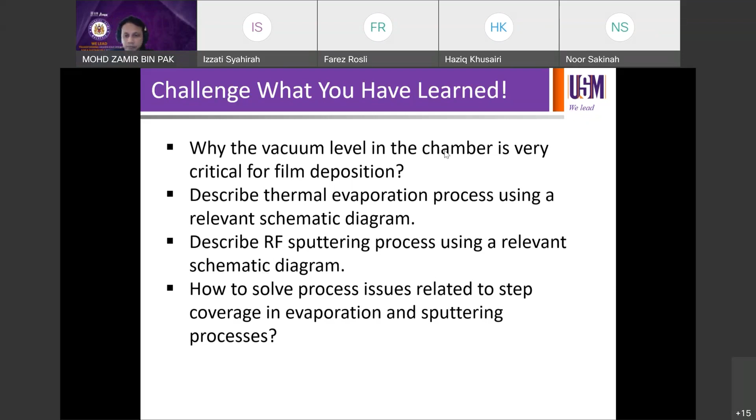Okay, so good, done. So let's move on to our new topic, which is CVD. So as I said last time, when we talk about film deposition, they can be divided into PVD, category besar, PVD physical vapor deposition, and another big group called CVD, chemical vapor deposition. And PVD can be divided into evaporation and sputtering. Evaporation can be divided into thermal and E-beam. Sputtering can be divided into DC and RF. Okay, nampak, kita dah habis the whole PVD.

Now we're coming to the second category, which is called CVD, chemical vapor deposition. And in CVD, we have quite a long list of types for CVD. Tapi kita akan just go through the basic ones, because the whole idea of having different CVD is actually, if you follow the history, if you read the history, selalunya kalau researcher or scientist dia jumpa satu proses, they work on CVD, then dia jumpa satu proses, they modify, and they can see certain improvement in the film quality or in the device results.

They coin that configuration as a new CVD. They are the first to coin it, dia yang bagi nama lah, more or less. Okay, dia jumpa tu configuration, also it works, then you call it something CVD, something else CVD. So that's why you can see so many different types of CVD. So this goes back to the literature - you have to understand why it was coined such a way, why it was named such a way, right?

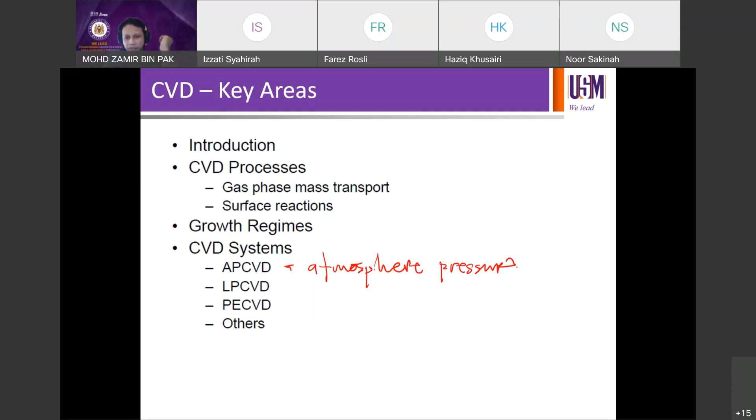So introduction to CVD, and then the processes involved, the steps involved in a typical CVD process, the growth regimes in CVD, CVD system, for example, AP CVD. AP is atmospheric pressure, so it can be done at atmospheric pressure, actually, not necessarily at vacuum, in vacuum condition. Atmospheric pressure, AP, ya, CVD itu sama ya, chemical vapor deposition, but AP is atmospheric pressure, so that means it can be done at atmospheric pressure.

Okay, ambient pressure. LP, apa LP? Low pressure, low pressure CVD. Apa PE? Anyone? Any idea?

Plasma enhanced CVD, plasma assisted. So you run your CVD, but you have plasma to enhance the deposition rate and so on and so forth. There are many more, depending on the configuration of the CVD system. The configuration will determine the name of the CVD.

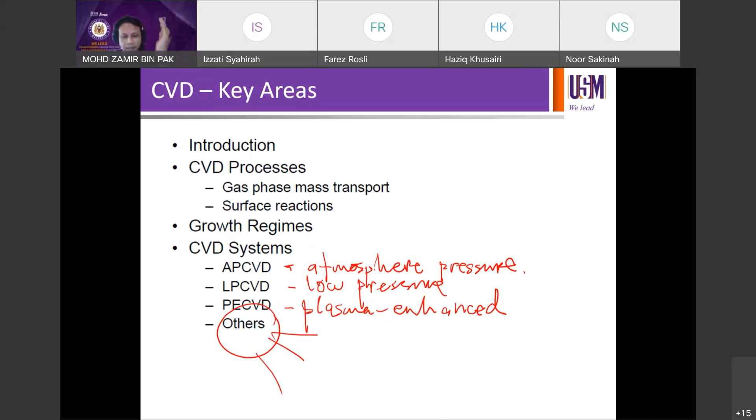Hot wire CVD is called HW CVD. What else? HFPE CVD, high frequency PE CVD. So you add high frequency in front, HFPE CVD, PE CVD, AP CVD, what else? LA CVD, laser assisted CVD. Many more, there's electron beam too. So we'll cover only the common ones, but that doesn't mean those are the only types of CVD available. There are many more, and perhaps in the future there will be different types of CVD invented by researchers.

After certain discoveries. So CVD, what is CVD? A thin film deposition process which involves a chemical reaction. This is the key word, chemical reaction. So try to compare this with PVD, physical vapor deposition. This is chemical vapor deposition, so it's not physical but chemical. That means it involves a chemical reaction.

For example, you want to deposit silicon. So let's recap while discussing this. If you run a CVD process to deposit silicon, which involves a chemical reaction, what you have to do is use silane. SiH4 is silane, silane gas. Silane gas is very, very dangerous, but it's present in every fab. If you run CVD silicon, you have to have silane, no choice.

It used to be an issue before, an incident. There was an incident at a fab, at Silterra, and also at Infineon - silane incidents. If you remember, I shared with you before about the NUS fire, whether during this course or 386, National University of Singapore fire - the building burned down, and it was shut down for about half a year or a year, perhaps even a few years, while they recovered.

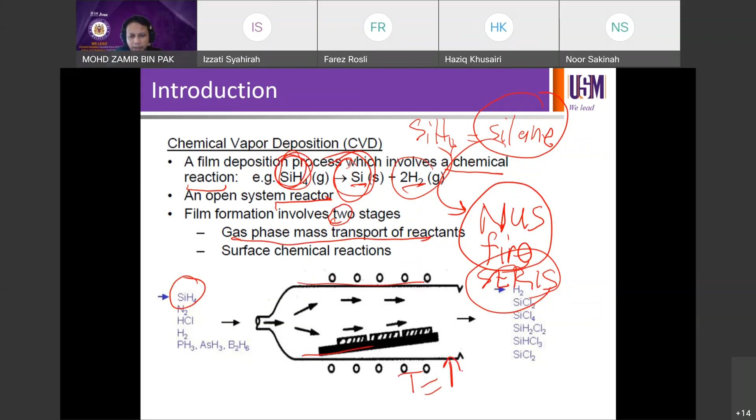Film formation involves 2 stages. To be able to deposit silicon, firstly you need gas phase mass transport of reactants - the transport of silane into the chamber. So if this is your chamber, it has to run at high temperature, because you need thermal decomposition. If you don't run at high temperature, there will not be any thermal decomposition, since you need heat to decompose, heat to break down the gas. So you have to have high heat from the high temperature process, then your gas will come in. Other methods can also be used if you want.

And then the second step will be surface chemical reaction. The moment your gas is transported into the furnace at a certain temperature, there will be chemical reactions on the surface of the substrate that will end up in the deposition of silicon by the CVD process.

So my question is, if you can relate to the previous topic, PVD - if you don't deposit your silicon by CVD, how would you deposit your silicon? If you can relate to the previous topic - you want to deposit silicon, but you're not allowed to use CVD. How would you deposit your silicon? Anyone? How would you deposit silicon? PVD, okay, you can use PVD. How? Which PVD? Aziz, which PVD do you want to use?

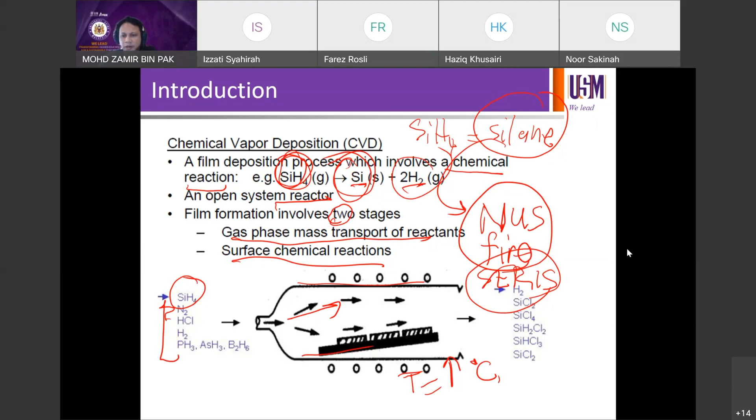So that's done. Let's move on to the next one, reactor type. It can be single wafer, it can be batch process. Typically, if you talk about mass production, then you have to go for batch process. Of course, there's no single wafer for mass production. Lab scale is okay, but if you run single wafer for mass production, you're deliberately trying to go bankrupt.

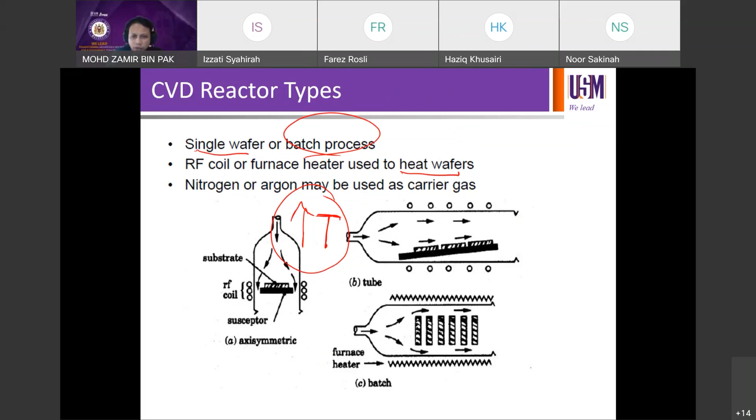Right, deliberately trying to go bankrupt. RF coil or furnace heater is used to heat wafers, so you need to have heating. You need to run the process at high temperature to induce thermal decomposition - remember, the key is thermal decomposition. Nitrogen or argon may be used as carrier gas. So the typical configuration is as shown below.

So what are the process parameters involved in a typical CVD process? Generally, there are a couple of factors, but there are more factors depending on which type of CVD you are using. Typically: the substrate temperature, the partial pressure of the gas, the total pressure, the gas flow, the time, the temperature, the configuration of the chamber, the wafer arrangement. Those factors will affect many things, and among the parameters in control are the growth rate, the thickness, uniformity, defects, particles, and so on.

So these are among the factors that you need to characterize after a CVD process or during the CVD process. Okay, growth rate you have to monitor during CVD. You have to monitor the growth over time - angstrom per second, angstrom per minute, nanometer per minute, micron per minute, whatever, depending on your intended thickness. So you can monitor that in real time, and as a result you'll get your film thickness. Growth rate leads to film thickness.

And then your defect density is typically done or characterized or inspected after the CVD process, just like what we discussed in our previous processes. So for every process you have to characterize next, and visual inspection is a compulsory step - a compulsory characterization that you have to do after every processing. After fabrication, you always have to do VI, visual inspection.

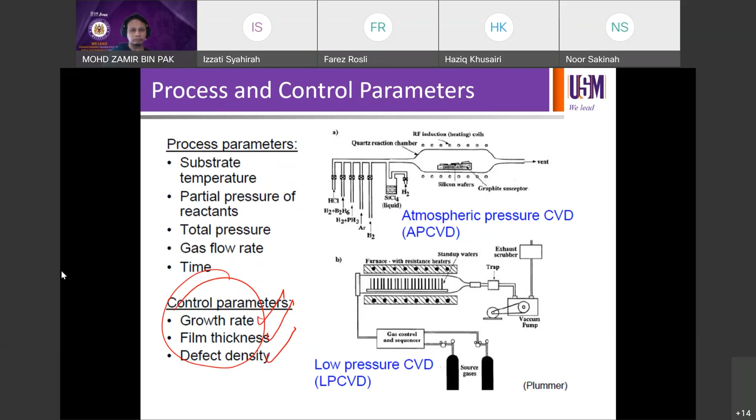What are the steps involved in CVD? The first one is transport of reactants by forced convection to the deposition region. For example, if you talk about deposition of silicon, you need to transport the silane gas into the furnace to be thermally decomposed into silicon and hydrogen. So that is the transport part.

Transport of reactant by diffusion from the main gas stream through the boundary layer to the wafer. So this has reached the wafer, somewhere there. The previous step was maybe further back, just entering. And now it has reached the surface.

The third one is adsorption of reactants to the wafer surface, and they start to be deposited on the wafer surface. Then there'll be surface processes, including chemical decomposition reaction, thermally decomposing the SiH4, surface migration to attachment site, and the silicon will be landed or deposited at the right site, incorporation, and other surface reactions. So this is where you get your film.

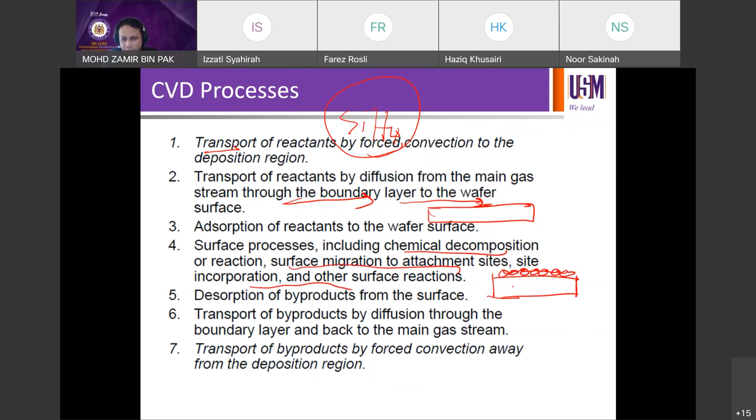Deposited. Say this is silicon as an example. If you are depositing your silicon on a quartz substrate, this is your silicon. So this is what's happening at this step.

Desorption of byproducts from the surface. This is where the byproducts occur. If you're talking about the reaction of silane, we're talking about silicon plus 2H2, and your byproduct will be the hydrogen. Desorption means they are released from the surface, so due to thermal decomposition, they can break into silicon plus 2H2, and the 2H2 will be desorbed and eventually

removed from the system. Transport of byproduct by diffusion through the boundary layer back to the main gas stream. So it comes out back to the main gas stream and it will be exhausted, we will exhaust it out.

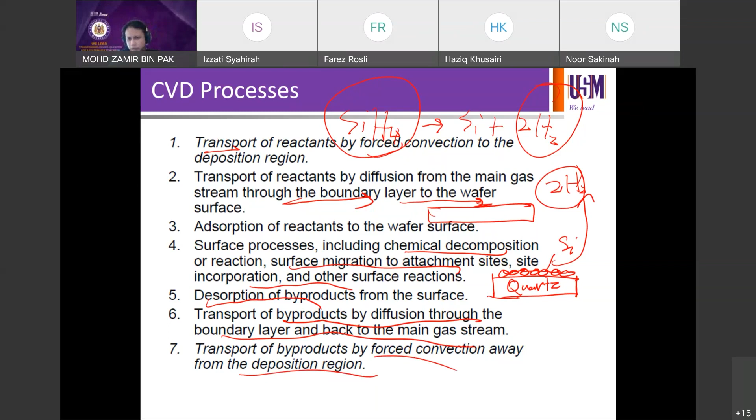Every system has input and output. Input is your gas stream for the deposition, and then the byproduct will be removed using exhaust. Transport byproduct by forced convection away from the deposition region, away, out through the exhaust.

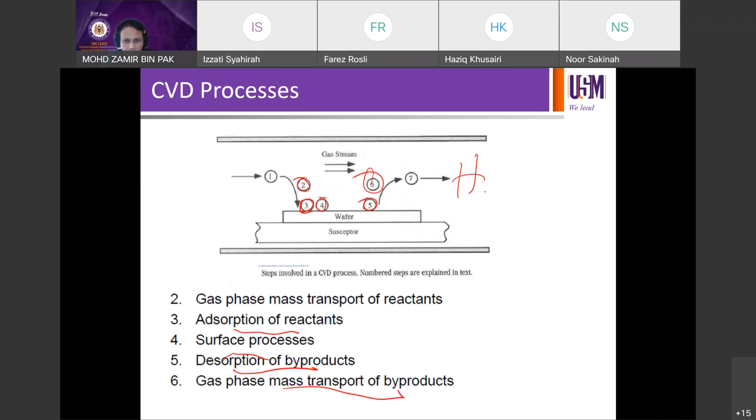So you can also represent these steps as this schematic. Gas stream coming in, then mass transport of reactant number 2, then adsorption of reactants to the surface, start to be deposited, and then there'll be surface process, and they can start the reaction. Then number 5, desorption of byproducts, hydrogen will be released, and the gas phase mass transfer of byproduct, removing the hydrogen,

and then it will be exhausted. This is the same thing, except this shows a generic representation of the thermal decomposition. In our case, we've been talking about silane as the precursor gas, silicon as your solid to be deposited, the film to be deposited, and your byproduct here will be your hydrogen.

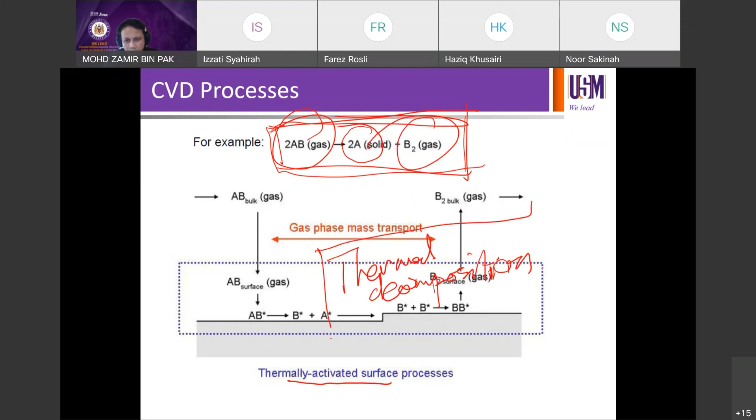So this is a generic representation for all thermal decomposition processes involving any precursor material, thermally activated. So you have to have thermal decomposition, that's the key. You have to use thermal, high temperature, to break the precursor gas into the intended material to be deposited.

In terms of the mass transport flux, you can also represent this by this reaction. So this is your silicon wafer, for example. Then your F1 will be the mass transport flux, F1 coming from silane, SiH4. F2 will be the reaction flux, because you want to deposit your film, and then the reaction.

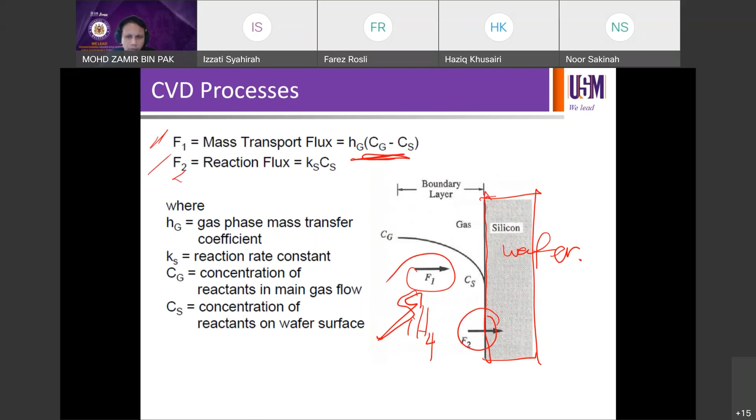We learned this before, when we talked about oxide growth. So batch process for polycrystalline or amorphous silicon prefers to be in surface reaction regime, with wafers at the same temperature. If you do the CVD process, you can actually control and regulate, meaning control, increase or decrease the temperature, and this will determine the quality of the final film. The quality here means the crystallinity.

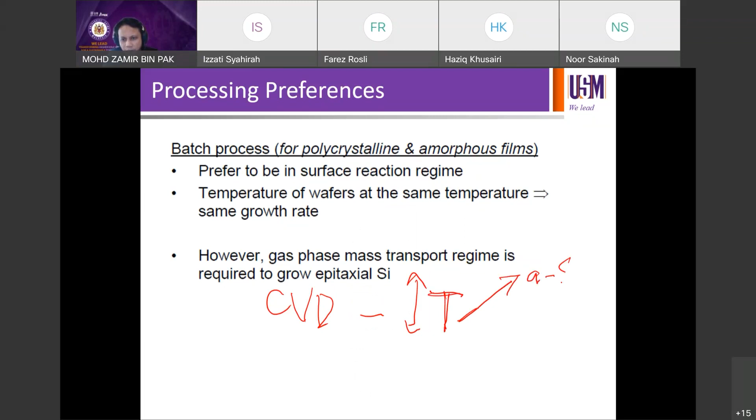So you can either get amorphous silicon, or if you talk about silicon, you may also get polycrystalline silicon. For this you have to go back to chapter 386. What does amorphous silicon mean? What does polycrystalline mean? All the grain boundaries and stuff. In some conditions, you may also produce monocrystalline silicon.

If you talk about epi process, you can actually get monocrystalline silicon, especially if you already have a silicon wafer, say P100 monocrystalline. Then you can run your CVD process to deposit a thin film of silicon, silicon too, but thin film, for example 50 nanometer, perhaps for a specific purpose in device fabrication. But you want that 50 nanometer to be monocrystalline - yes, that can be done, because you can run that at a certain temperature, especially high temperature.

The crystallinity of the deposited layer will take up the crystallinity of the substrate - meaning it will follow the crystallinity of your silicon wafer. In this case, P100 is monocrystalline. So as a result, the epi layer deposited by CVD at high temperature will emulate or follow the crystallinity of the substrate, which is monocrystalline. As a result, you can get monocrystalline silicon thin film. So that can be done.

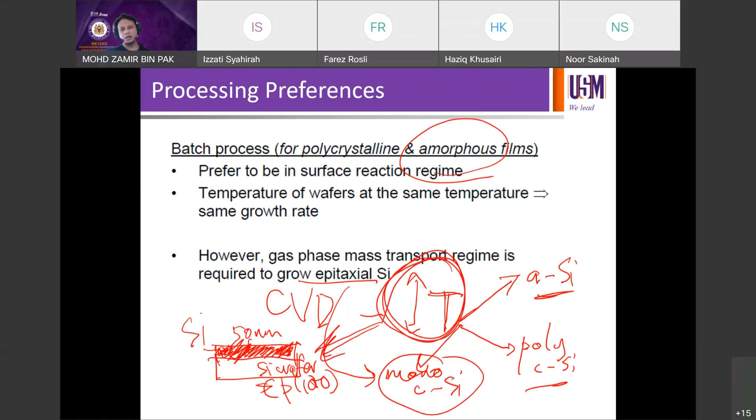So it's just about how you regulate the temperature. If you go for high temperature, it's a lot easier to get monocrystal on whatever - monocrystal silicon on silicon in this case. So you can just deposit silicon thin film on a silicon wafer. It doesn't have to necessarily be a different layer on silicon - it can also be silicon on silicon by CVD, okay, or by evaporation, by sputtering on silicon too.

So you may wonder, why deposit silicon thin film on a silicon wafer when the wafer already exists? Well, it depends on what you want to get in your process and in your device. Because you can also use, for example, your CVD to deposit amorphous silicon on monocrystalline silicon, using the same wafer. But then you can tune the process, usually at low temperature, to deposit 50 nanometer of silicon, but that particular silicon can be amorphous - it's not necessarily monocrystalline silicon or polycrystalline.

So it depends on what you want. If you go for heterojunction - if you talk about silicon solar cell specifically - it uses a monocrystalline P100 silicon wafer, but then the solar cell itself is heterojunction. Heterojunction here means, we already learned this in 386 right, you are depositing another layer of different band gap.

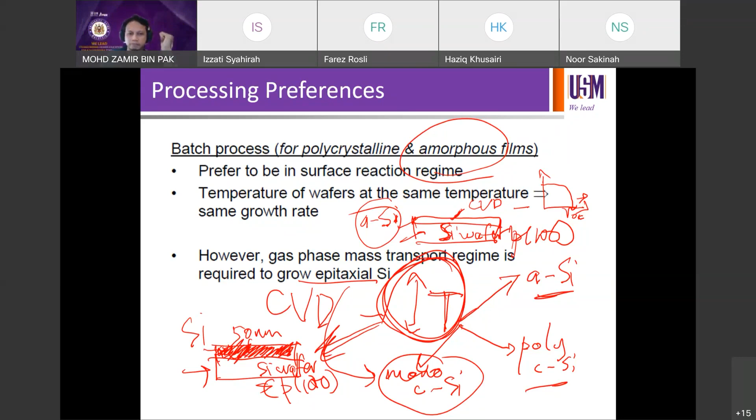That's why it's very important to relate the fundamental in 386. That's why the subject becomes a prerequisite. If you don't learn it, you become the missing piece in understanding. You know the process, but you don't know the fundamentals. When you want to relate the process to the fundamental, you'll have missing pieces - the explanation won't be complete. So once you cover both, you know the fundamental and the process, then you combine both and decide what to use for your devices.

For epi growth, typically if you want to get epi - let's finish this slide then we stop for a few minutes. Epi, you want to get monocrystalline deposition. To get monocrystalline, like I said, if you get mono on mono it can be done, but you need a high temperature process and slow growth rate. Your deposition rate per minute per second has to be low - slow process, but that will ensure monocrystalline quality. If you go faster, you'll probably get polycrystalline or just amorphous. So if you want amorphous, you can go as fast as possible since it doesn't compromise anything. But if you want mono, you cannot go so fast.

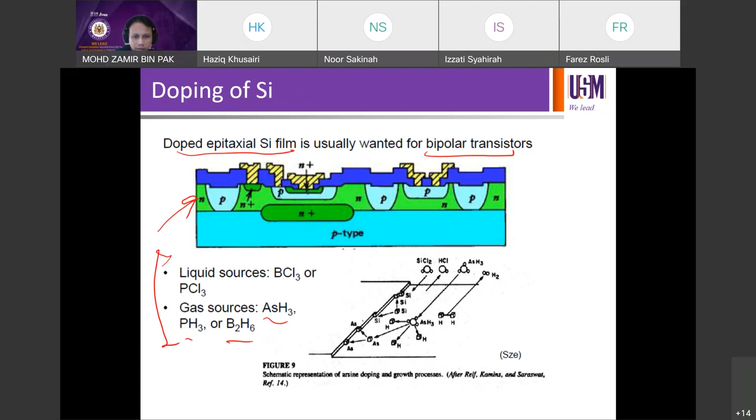If you talk about doped epitaxial silicon film, for example, these are the gases involved: PCl3, arsine, phosphine, diborane for doping, for the deposition process.

Doping of silicon - we've learned about doping into silicon for quite a bit. We've discussed diffusion, we've discussed ion implantation, and by now you already understand that if you want to dope silicon to make it N-type, you use group 15 atoms, for example phosphorus, antimony, arsenic. If you want P-type, you use group 13, like boron, aluminium, and gallium. So those are the common ones, assuming the host atom is silicon.

So when you run your diffusion process, you want to incorporate your dopants into silicon. Remember when you dope, you're actually incorporating foreign atoms into silicon. So you introduce new atoms into silicon, but there are possibilities of, for example, out diffusion.

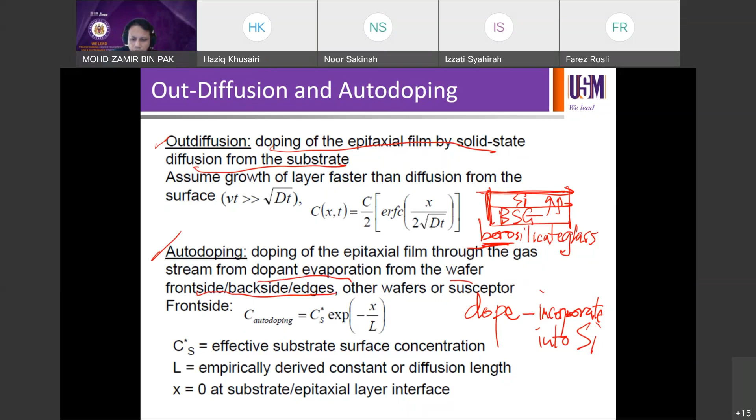I think we have this figure for auto-doping, for example auto-doping processes in an epitaxial reactor. So you're running this process in a furnace, epitaxial furnace. Illustrated here are evaporation from wafer number one, front side. Since this will be out diffused, you can actually auto-dope this front layer, or you can also auto-dope the neighboring substrate or film, because you have a gas stream coming in.

So the gas stream, acting as a carrier gas, will bring the evaporated dopant into the atmosphere within the chamber, within the reactor, to auto-dope the next substrate. That's possible from wafer front side, number one. From wafer back side or edges, it's also possible, you can dope to the side or to the edge. So you don't intend to dope, but then you dope due to the auto-doping effect.

From other wafers to other wafers, like this. Also from the susceptor, which is the holder. There are possibilities to get your dopant from the susceptor as well.

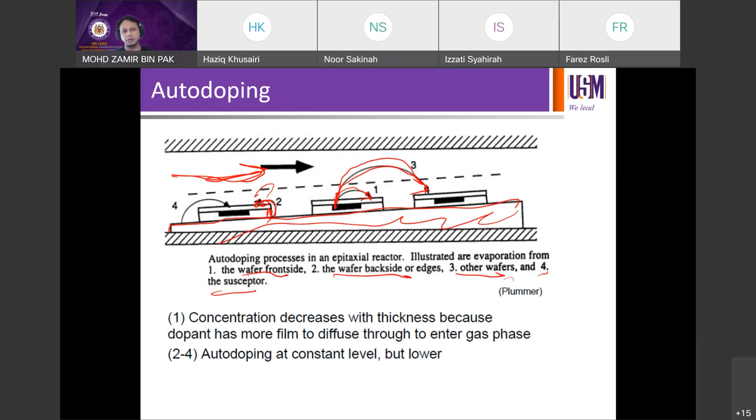Concentration decreases with thickness because the dopant has more film to diffuse through to enter the gas phase. So this will not be as critical if you have a thick layer. The possibility to happen is very small, but the possibility is there. But if your film is very thick, high thickness, the impact will be much lower because the dopant you auto-dope has a bigger volume to cover. Hence it will take some time and a big volume to cover, so as a result the effect will not be too significant.

On the other hand, if you're working on an epitaxial layer, which is typically very thin, if you have a considerable level of auto-doping, then you might change your epitaxial layer's doping level. So if it's not that critical in the thick layer, talking about microns, then probably you will not be able to see this unless you do your characterization. For example, remember SIMS characterization from before? Anyone remember SIMS?

Concentration on the Y axis, concentration of whatever dopant in this case, and the depth into the sample on the X axis. When we talk about diffusion, we talk about diffusion junction profile, ECV, SIMS. SIMS is secondary ion mass spectroscopy, one characterization method that you can use to understand the profile of your dopant.

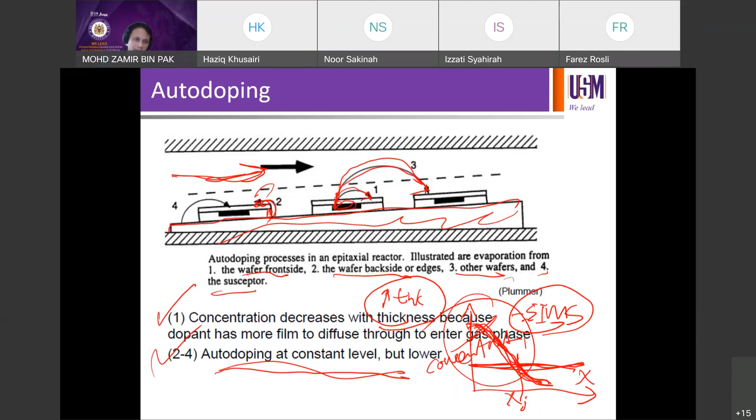If you talk about 2 to 4: wafer backside, other wafers, and susceptor. Auto doping at constant level, but very low, because it's relatively harder to transfer across that distance. But it's a lot easier to happen with the front side in the same wafer, just the next layer, just the neighboring layer. So the possibility of happening is higher. That's out diffusion and auto doping.

So, from my PhD, let me just share with you.

My PhD title was a bit long: Evaporated Laser Crystallized Silicon Thin Film Solar Cell on Glass Superstrate.

In front of that there was also light trapping, development of light trapping - I forget the exact title. That was 2016, 5-6 years ago. Development of light trapping in evaporated laser crystallized silicon thin film solar cell - I'd like to relate this to the out diffusion topic.

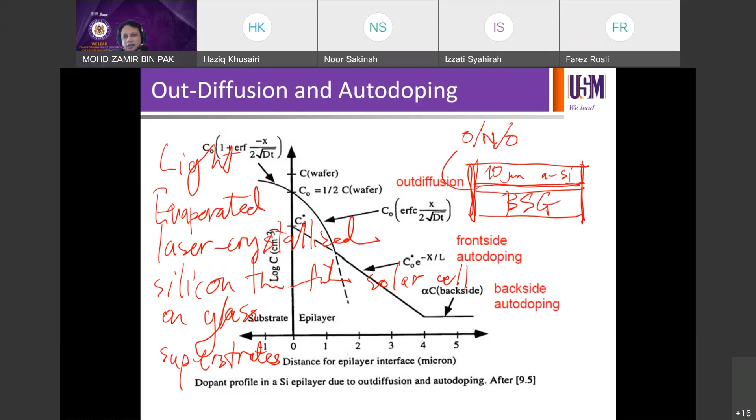I deposited 10 microns of amorphous silicon on borosilicate glass, but in between there are interlayers we call ONO - oxide, silicon nitride, silicon oxide. There are 3 layers basically in this interlayer: oxide near the glass, nitride in between, and another oxide near the silicon.

So I evaporated 10 microns of amorphous silicon using electron beam evaporation that we just learned in the previous topic. Then I obtained amorphous silicon, but I wanted to get polycrystalline. So how to get polycrystalline?

I use laser crystallization - hence the name in the PhD title. Evaporated laser crystallized, meaning amorphous silicon was laser crystallized. Using the laser, you scan it like you scan a paper in a scanner, you can see it move. So the exact thing took place - our laser used 808 nanometer IR laser, continuous scan across the film.

The moment you're doing the scanning, the portion of the silicon film on the glass that the laser beam scans across will melt at 1400 degrees Celsius. Remember we talked about the Czochralski process where you melt the silicon - in this process I use a laser to melt, to do the melting on the glass.

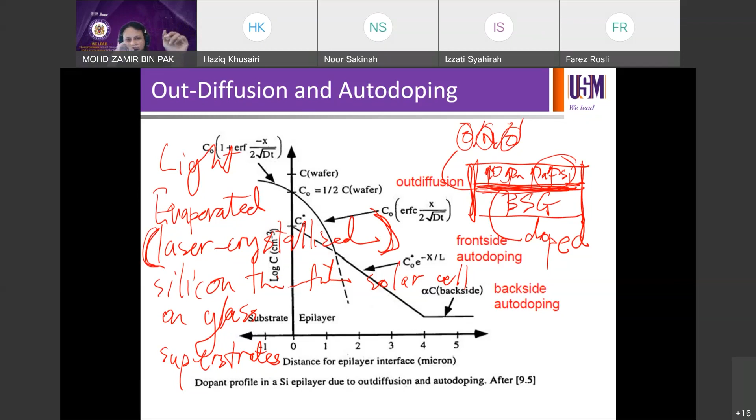So you can avoid it or you can choose not to introduce it. Generally you want to avoid defects, but in some cases you want to introduce a defect for some reason. So this is about utilizing the knowledge that you have. You don't necessarily have to take this out-diffusion as a bad thing or bad scenario - you can use it to your advantage.

That's the point. So once you've learned all these processes, you can plug them in - why don't we try this, why don't we combine with this - that's process integration. When you become a process integration engineer, you have to know how to incorporate litho, etch, with implant, with diffusion, but also with specific film deposition techniques to produce your device. That's process integration - combining various fundamental knowledge from each process into a process flow to deliver your device.

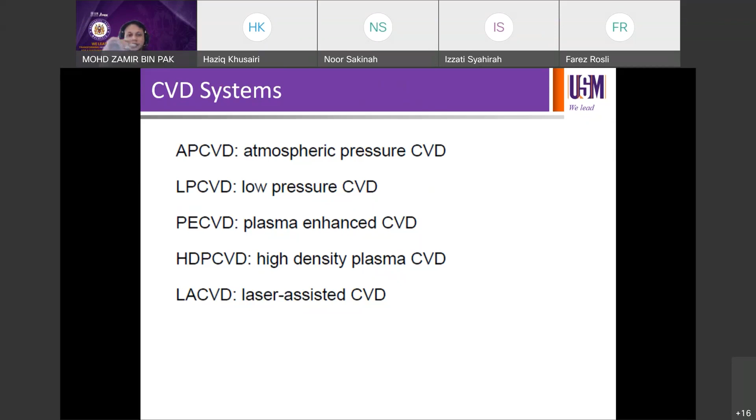Right, CVD systems - it can be APCVD, LPCVD, PECVD, HD high density plasma HDP-CVD, LACVD laser assisted, many processes, many types of CVD. But the basis is still CVD.

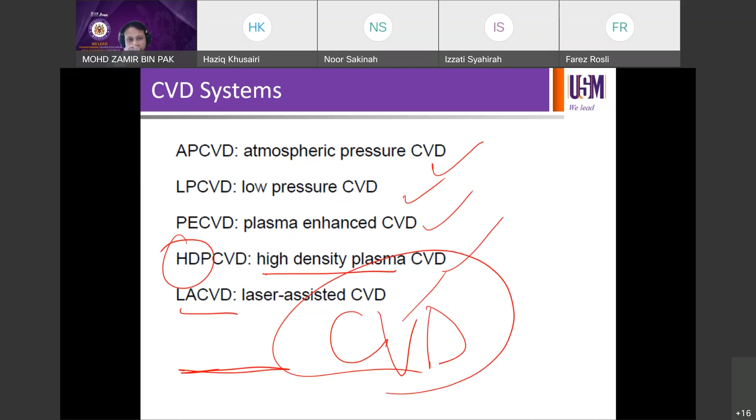You can have many things added to the front of the process name in order to get whatever properties you want, because every single process will give you different properties of the film that you want. Maybe certain properties or certain processes are good for silicon but not good enough for ITO.

Maybe a certain process is very good for ITO but not good for silicon, or good for ITO but not good for silicon dioxide. Or you can just use the very same platform, PECVD, for silicon oxide and silicon nitride, just by changing the gas - switch to nitrogen, switch to oxygen, you still have your silane there to give you silicon, but you combine it with oxygen or with nitrogen in the very same chamber.

I mean, you arrange them in sequence. Meaning, for example, if you go back to my PhD work - silicon, then you have the interlayers, the three layers - ONO layer: oxide, nitride, oxide. You can deposit these ONO layers in PECVD.

Oxide first, followed by nitride, then oxide, without breaking the vacuum. Without breaking the vacuum here means you can retain the vacuum condition in the chamber - you just introduce different gases at different times. So in this case, you start off with silane and oxygen to get silicon dioxide, then you shut off the oxygen, turn on nitrogen, and you get silicon nitride, for example.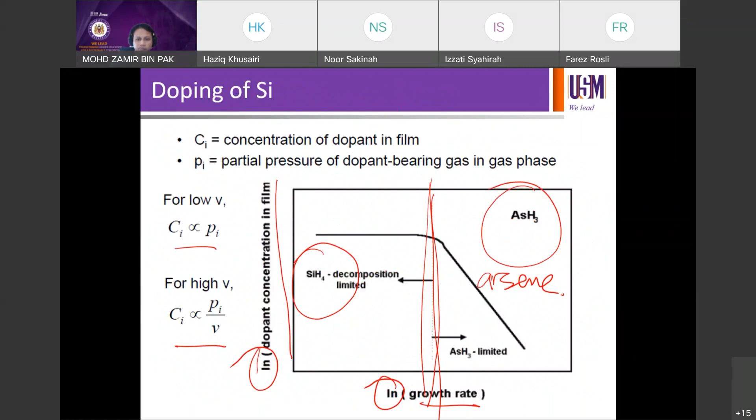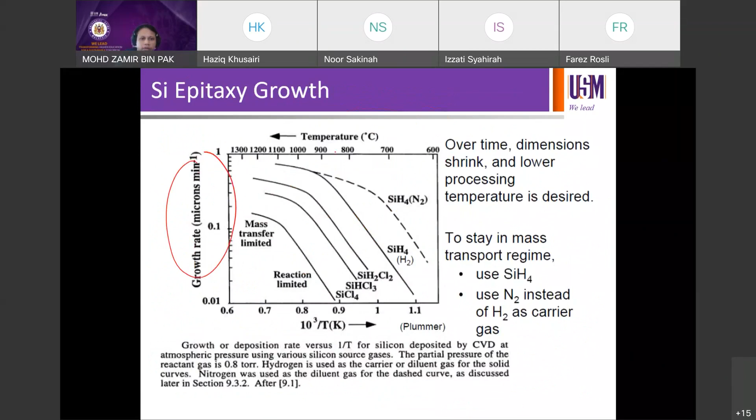This curve shows growth rate versus temperature. You can't always relate this curve to every system, because every system is unique in terms of temperature and growth rate, or velocity rate.

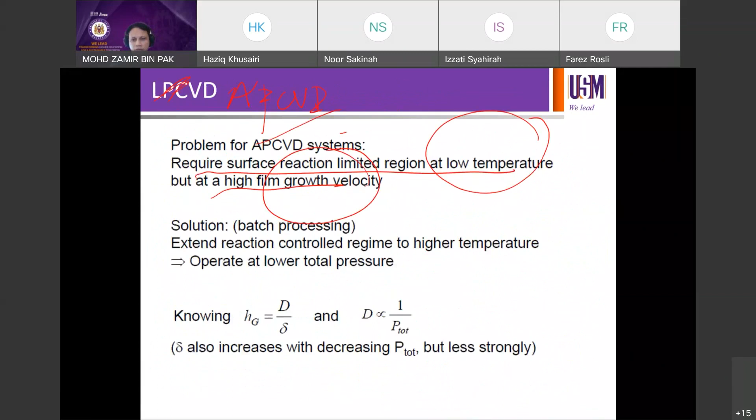So how do you find the sweet spot, meaning the optimum point? Sometimes you get a curve like this one, where it rises and then saturates. Sometimes you get something like a plateau instead.

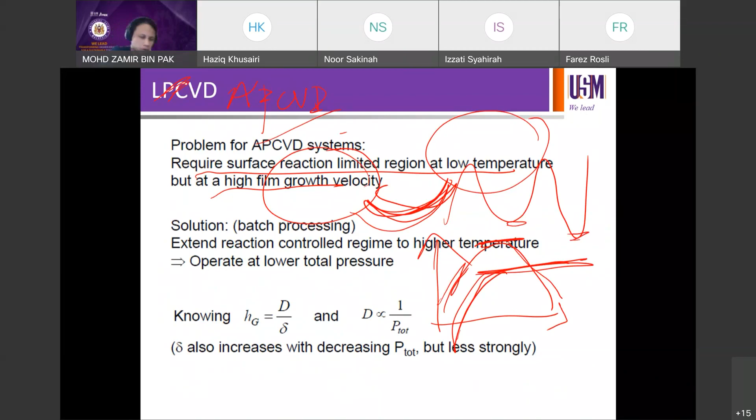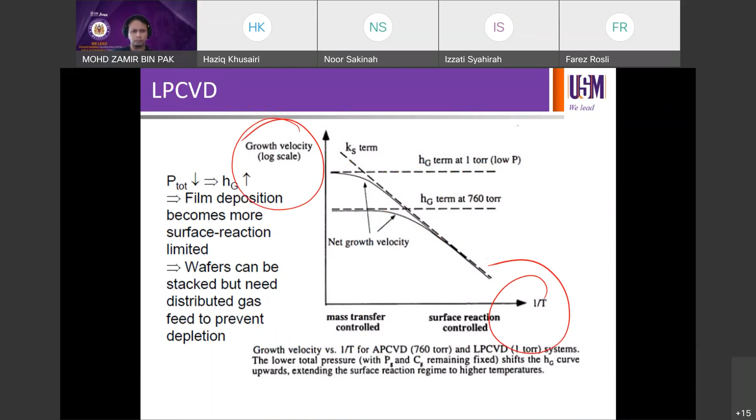This one is LPCVD. In terms of growth velocity and temperature, it's very unique to the system. This next one is the same thing - temperature and deposition rate is very unique to the system.

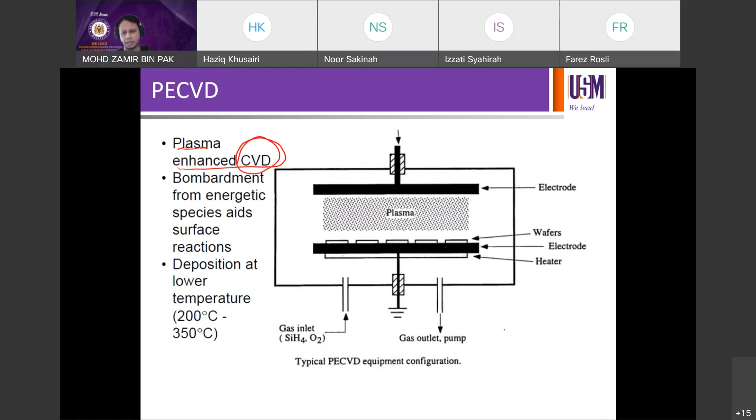This is an example of PECVD - plasma enhanced CVD. So you use plasma to enhance the CVD process. The key mechanism is still CVD, but the rate is enhanced by the plasma.

If you look at the configuration, it looks pretty similar to what we discussed during sputtering. You see plasma in the middle, and then you have two electrodes, counter electrodes with opposite polarity, then gas inlet for silane and O2, connection to the pump, grounding, and voltage to form the plasma. So the whole thing is still like the plasma system.

It involves bombardment of energetic ions from the plasma, and when you have this capability, plasma enhanced, you have an option to reduce the temperature, because in essence, CVD has to involve thermal decomposition, and to have thermal decomposition you need the thermal component, the heat component, a high temperature component able to decompose. But when you have plasma, that will do part of the job.

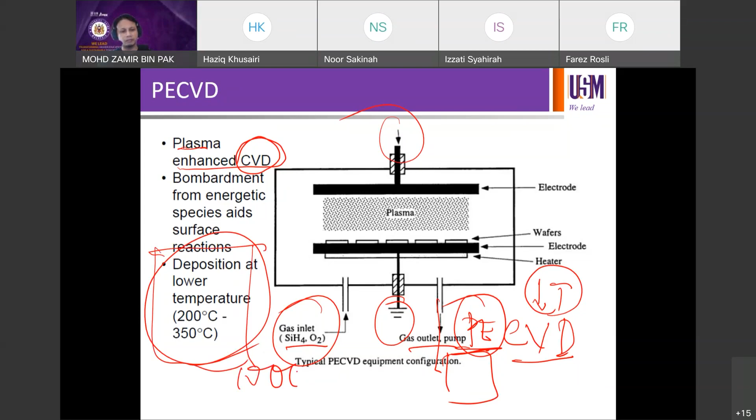The plasma will enhance the decomposition, and as a result the system doesn't need to run at a very high temperature. Perhaps if you run a typical CVD, you used to run at 1000 degrees C. So with plasma enhanced, since you already have the plasma in the system which will enhance the decomposition, you then have an option to reduce the deposition temperature.

So when you have plasma, you have low temperature, and you can regulate or optimize these two parameters in order to produce the intended properties of your deposited layer. The plasma will enhance the decomposition mechanism of the incoming gas, silane in this case, and you have an option to reduce temperature, which you don't have without plasma - you'd have to run at high temperature, around 1000 degrees C plus minus, to initiate decomposition.

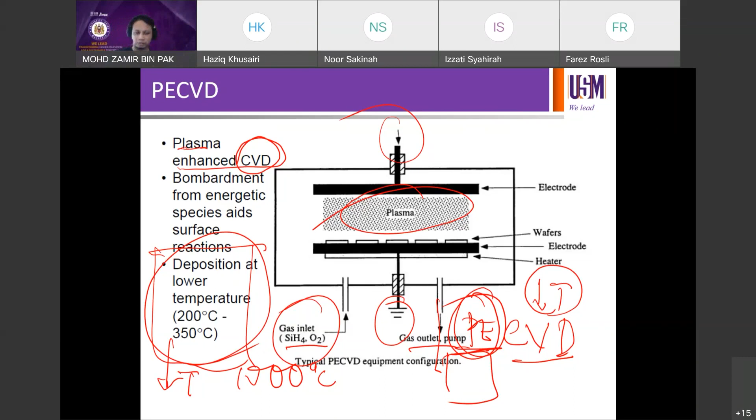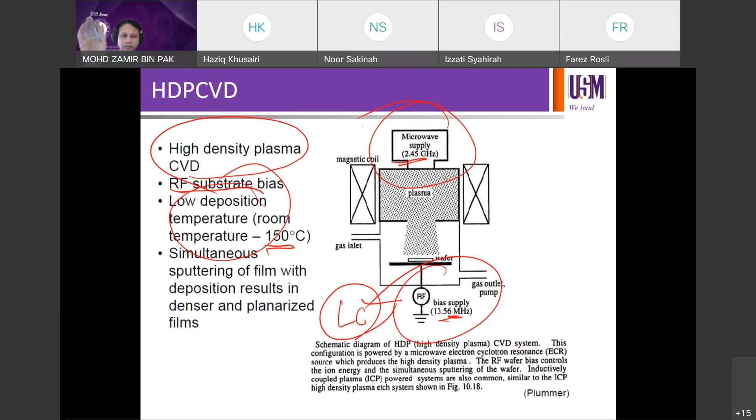With high density plasma, it's plasma enhanced just like PECVD, only the density is higher. You can even reduce the temperature lower - if earlier it was like 200 to 300, now you can reduce to 150 and still have CVD going on. So imagine you started with 1000 degrees C for conventional CVD, then use plasma to reduce to 200-300, then use high density plasma to further enhance the process - you have a window to reduce temperature because you've enhanced the decomposition.

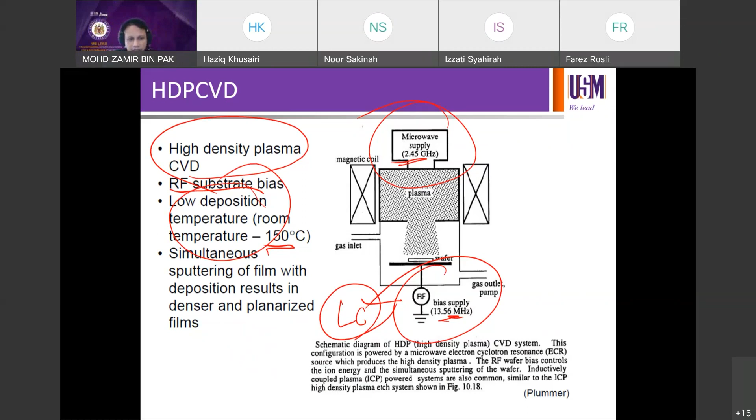So you have the option to reduce temperature - that's how you play it. The moment you have plasma, you can reduce temperature. If you don't have plasma, you have to increase temperature, else you won't have CVD. Simultaneous sputtering of film with deposition results in denser, planarized properties of the deposited film.

Almost done. Step coverage, mean free path - lambda we already discussed. If you have high vacuum, then you have a longer mean free path.

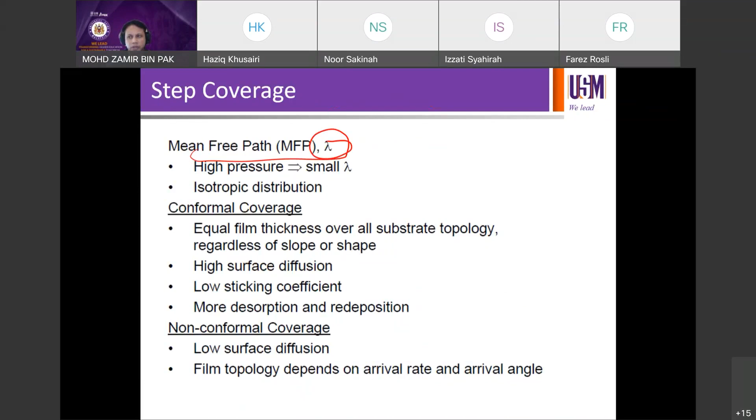If you have not so high vacuum, meaning in the region of 10 minus 1, say, then your MFP will be very small. So high pressure - the best word to say is pressure. If high pressure means close to atmospheric, then small MFP, or small mean free path, lambda. If you have low pressure, then higher lambda, right?

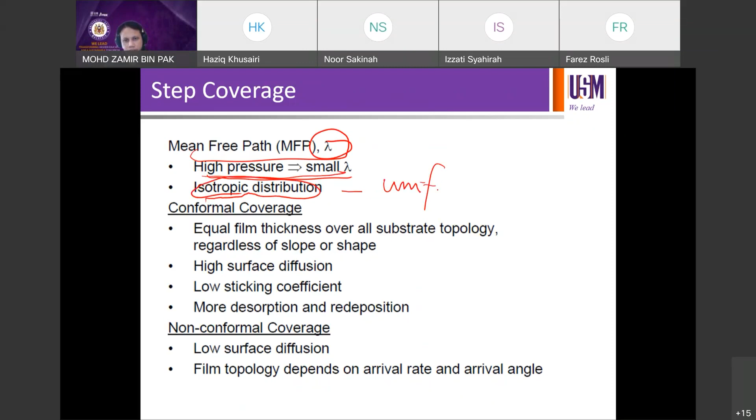So if you want to have a more isotropic, uniform distribution, you need to go for low vacuum. But that doesn't mean low vacuum is always good.

It depends, just like what we did last time when I was in Fuji Electric. Certain process parameters require you to run at high pressure to introduce some roughness, and that will help to improve certain process parameters. And process parameters really depend on what sort of devices you are working on. For a transistor, a set of parameters; solar cell, a different set of parameters; SSD, a different set again. So you really have to go and look at the set of parameters you want to produce, and then go back to the process and customize it to get the optimum set of parameters intended.

Conformal coverage means equal film thickness over all substrate topology, especially if you want to deposit over features. You want to have something like that ideally, but you'll probably end up with something like this.

Not conformal. If you look at this sketch, the second one, look at the edge here - what happens. It breaks at this edge.

Like, there's a student of mine doing his MSc now. They try to deposit this pyramid, silicon pyramid. So what he's trying to do is spin coating, like the lithography resist coating.

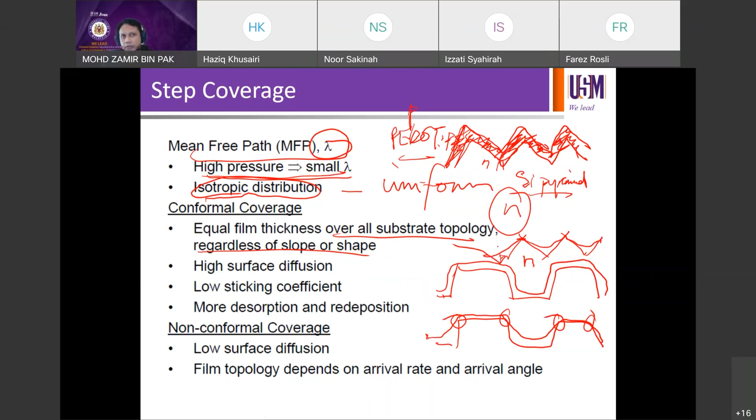This is the real issue I would like to share - a real issue in real research or manufacturing. When you spin coat, or run other processes, it's the same - if you have existing features below, whether square, pyramid, nanowire, nanorod, porous, whatever, you will suffer from this condition if you don't optimize your process properly.

So in this case we want a continuous P-N junction, but in some conditions your P-type breaks near the peak, near the apex, near the summit. So when it breaks, that means you have a P-N junction here, but you don't have a P-N junction there because it's broken. So there's no P on N on the top, but you have it again here, P on N.

There it breaks again. Here you have P on N again, so you have a P-N junction. So your P-N junction is not continuous.

And to relate this back to what we discussed last time on lateral conduction - you want to extract carriers from all the places across the surface. So just imagine if you put this into a device.

If you have a metal contact here to extract carriers from the apex, from the summit, and a metal contact on the other side to extract carriers from the rear side - the rear side doesn't have that issue because it's flat.

But on the front side, if your metal contact sits on the valley area, there's no issue because the P-N junction is there, so carrier separation will be effective there. We learned about carrier separation, right?

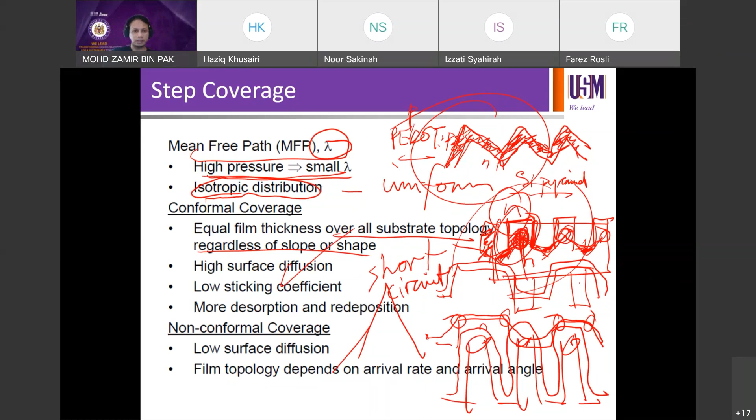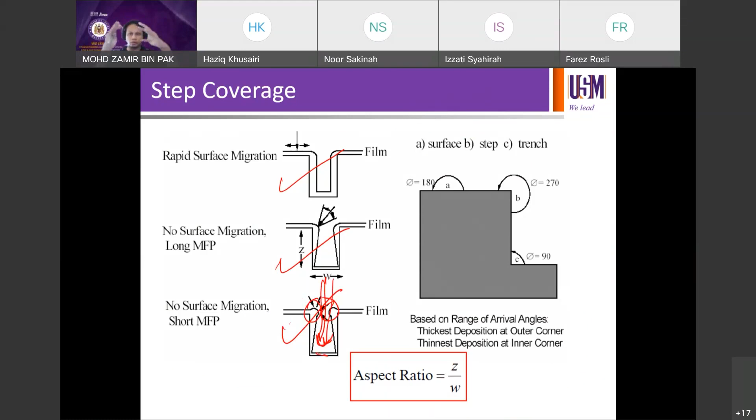This is another illustration of step coverage. You want to get something like that, but you'll probably get something like this or something like that, even worse. You block the incoming films or incoming atoms or molecules to be deposited because you close the channel for deposition.

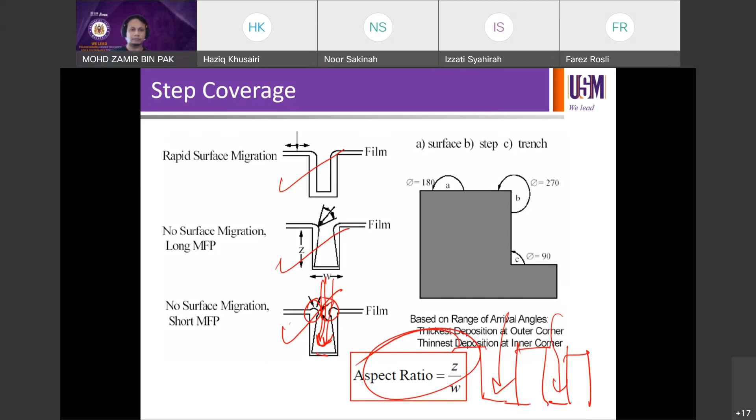I think we've done for the process, so we've done the CVD. Is it okay so far?

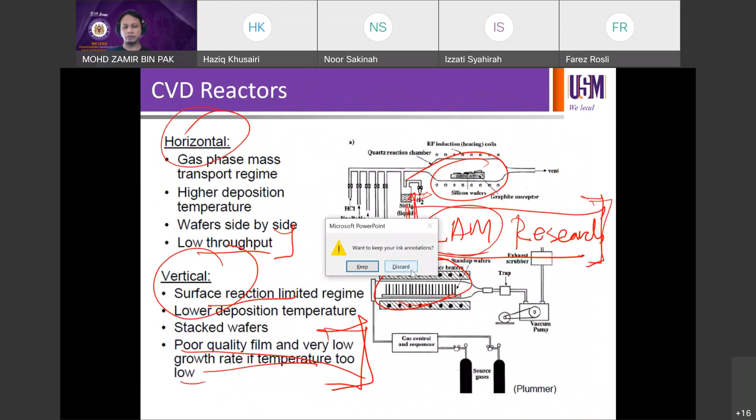If you're interested, try to look at Lam Research. If you're not so interested in the process, but more interested in the equipment side, if you want to install vacuum pumps, or do automation, robot teaching, handle sensors, and you're into circuitry, good at reading circuit diagrams, then you can apply for an equipment manufacturer, like Lam Research.

Okay, like Lam. So any question on CVD? So we have completed PVD and CVD.

So on Monday, we'll move on to process integration, where you combine all the processes that you've learned before to fabricate IC, or integrated circuit. But you can use the very same knowledge, the very same process, to fabricate some other stuff as well. And the process integration knowledge will be useful when you do the presentation later on, because I'm going to teach you from an empty wafer, first step, second step, until you complete the device.

Okay, what do you combine? What comes first? What comes second? What's next? Why is it so? How do you do the masking? How do you etch? Where do you etch? Why is it like that? All of this will be taught in process integration.

And you can use the same knowledge to do process integration of other devices, solar cells, LEDs, SSDs, whatever is in the industry here. You can just use certain processes then arrange them accordingly. Then when you arrange that, it's like a flowchart. That flowchart, the process, will actually represent a process flow of your device fabrication.